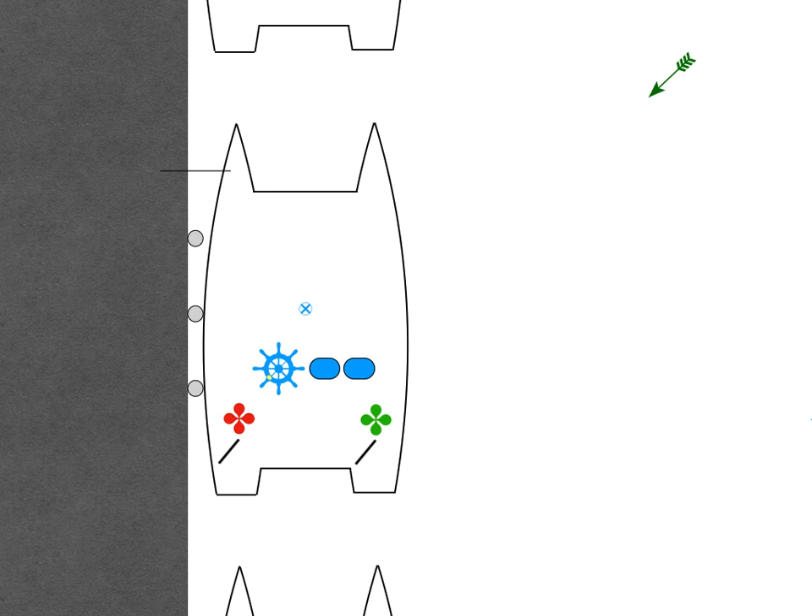When you're all ready to go, get the lines slipped, leaving the most windward breastline until last. And as you can see, we've got a headwind as well as a crosswind. So in this example, we're going to take off the bow breastline last. When the lines are all slipped, put the engine nearest the dock into forward idle and the other engine into reverse idle.

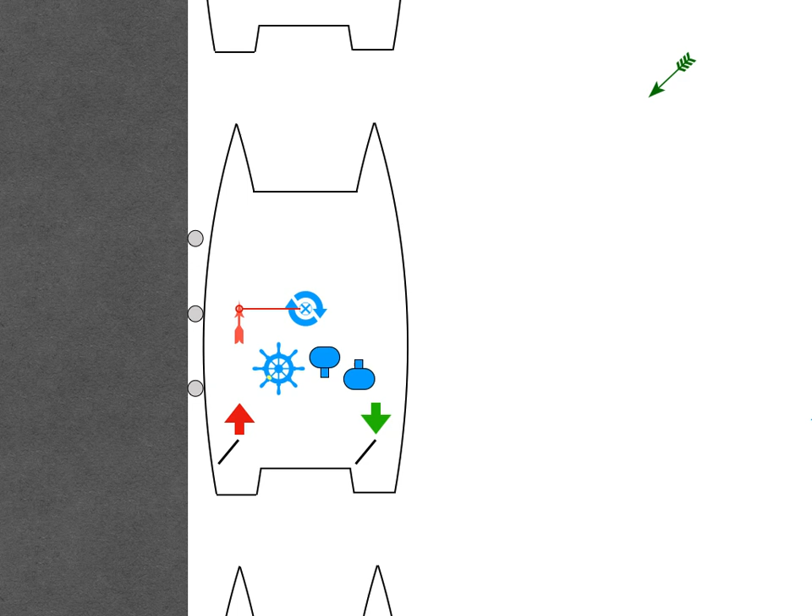Let's have a look at the forces that we've just set up by doing that. The port engine is left of the centre line of the boat, so its forward thrust vector creates a turning moment to starboard. The starboard engine is right of centre, so its aft thrust vector also creates a turning moment to starboard. The port forward thrust and the starboard's aft thrust cancel each other out so that the boat doesn't accelerate either forward or aft. However, the turning moment to starboard remains.

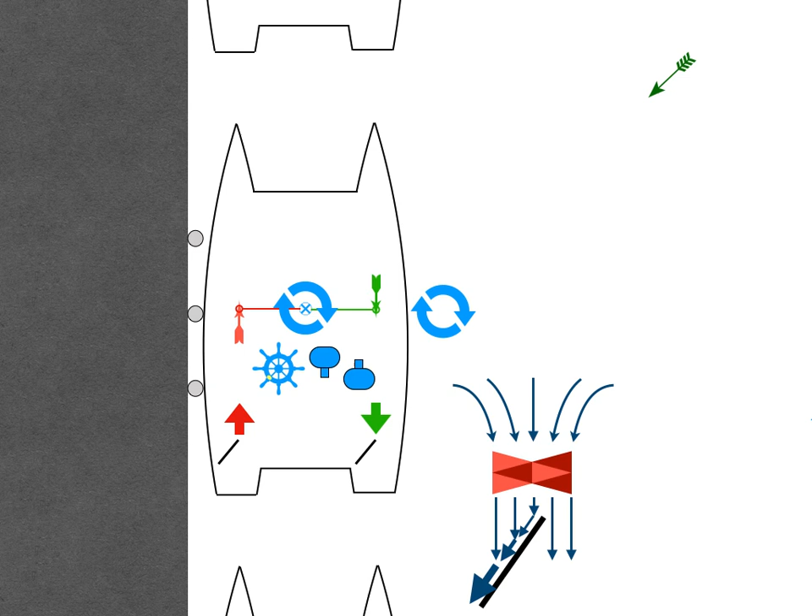The rudders are also creating forces. The prop wash from the port engine creates a strong thrust vector to starboard. This force is aft of the centre of gravity, so this creates a turning moment to port. The starboard engine, drawing water past the rudder, creates a very small thrust vector to port. This force is aft of the centre of gravity, so it creates a very small turning moment to starboard.

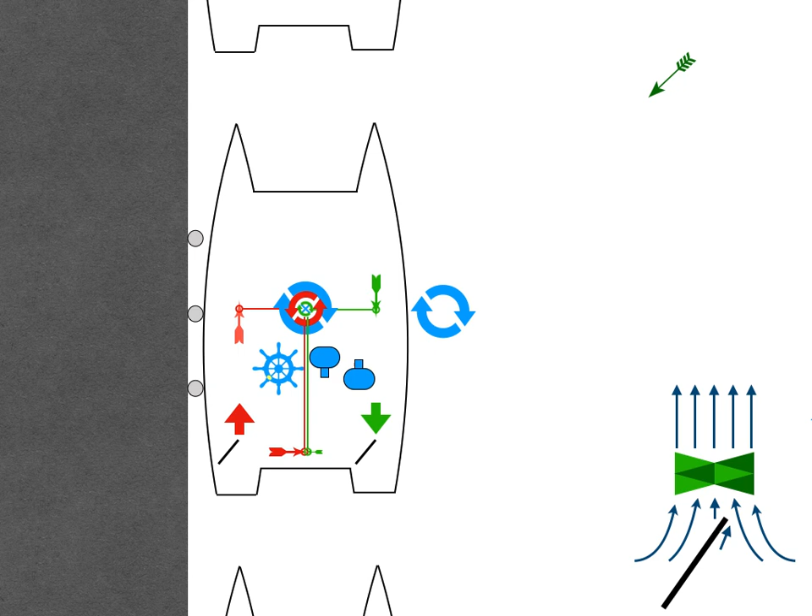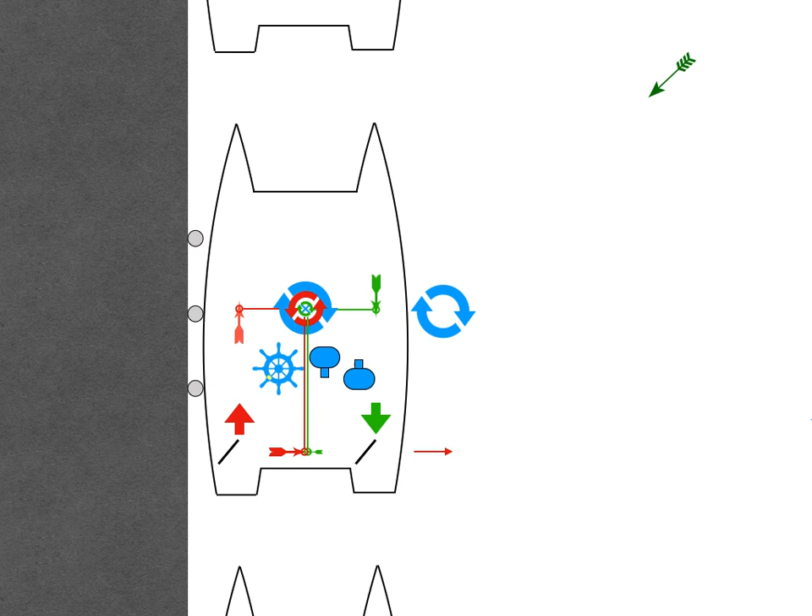The large port rudder thrust vector to starboard is only slightly cancelled out by the very small starboard rudder thrust vector to port. This leaves a residual thrust vector to starboard. The larger turning moment of the port rudder works against the turning moment of the engines, while the smaller turning moment of the starboard rudder works with the turning moment of the engines. These three combine and result in a slightly smaller turning moment to starboard.

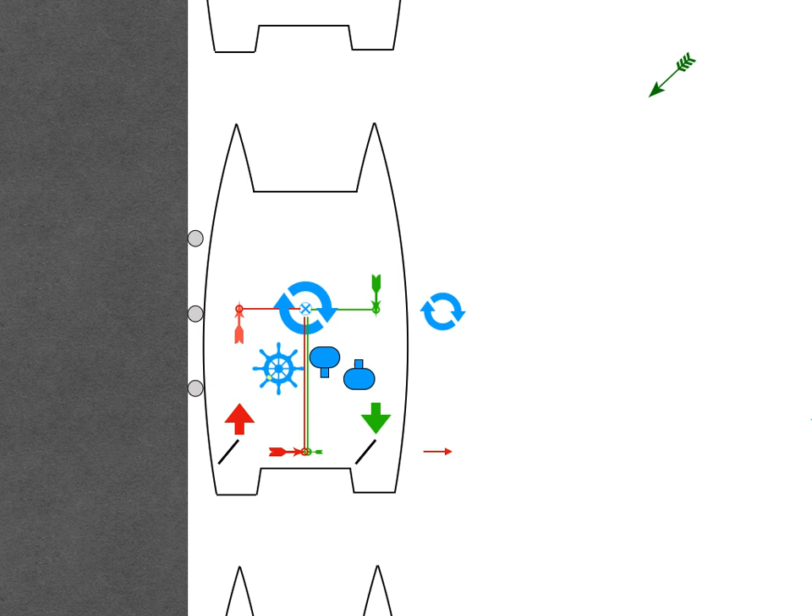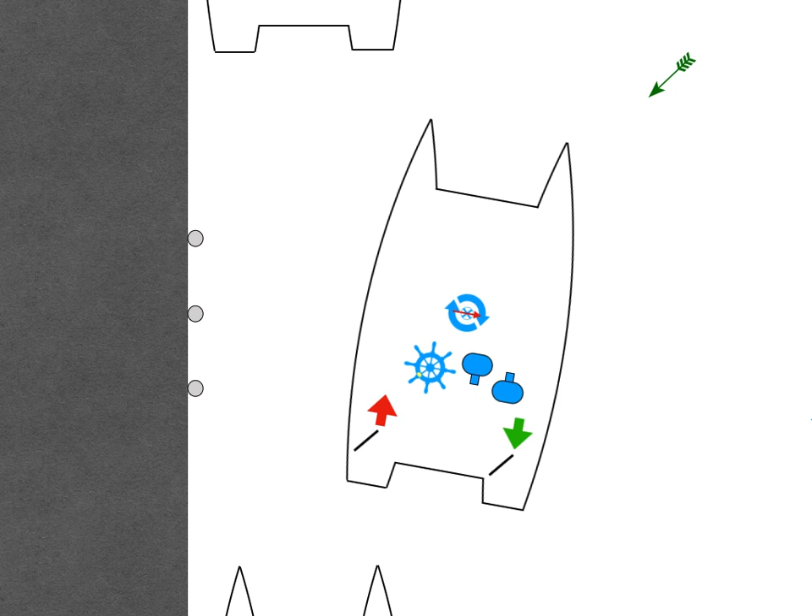Let's now look at what these forces are going to do to the boat. So we'll put them back where they belong over the boat. So the boat's now going to move away from the dock and turn slowly away from the dock at the same time. If it doesn't move, then the force of the wind is greater than the residual thrust vector. So simply increase power little by little on each engine equally until the boat starts to move. You might end up with a lot of power on. As long as the boat's not moving fast, that is fine.

If the boat starts to drift forwards or backwards with the elements, simply increase thrust a little on the appropriate engine. Once the bow is well clear of any other boats or obstructions, simply put the engine that was in reverse into neutral and increase a little on the engine in forward. This keeps the boat tracking gently into the wind to avoid being blown back to leeward. Steer where you want to go, and finally bring the other engine into forward gear and away you go.

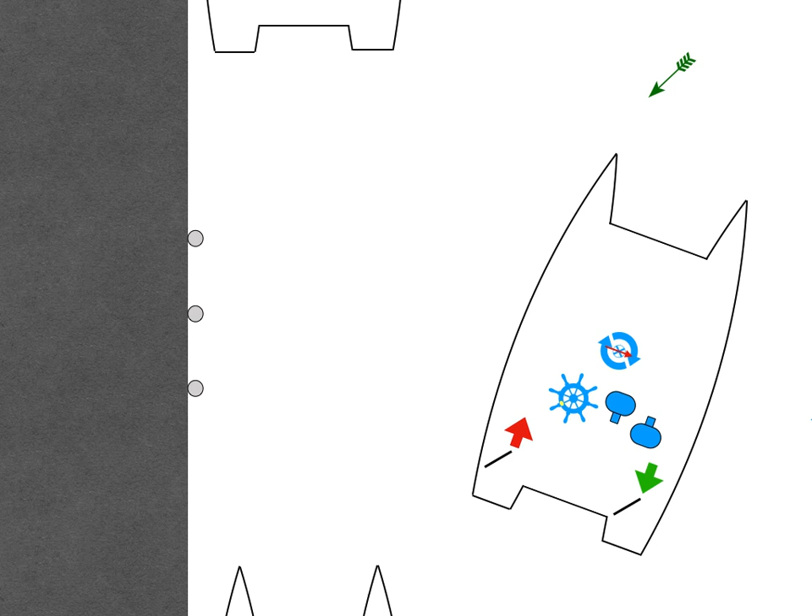Quick summary. To move the boat sideways against a breeze, turn the helm fully towards the dock. Let go all lines. Set the engine nearest the dock to forward idle and the other engine to aft idle. If the boat doesn't move, increase power on both engines a little at a time until it moves.

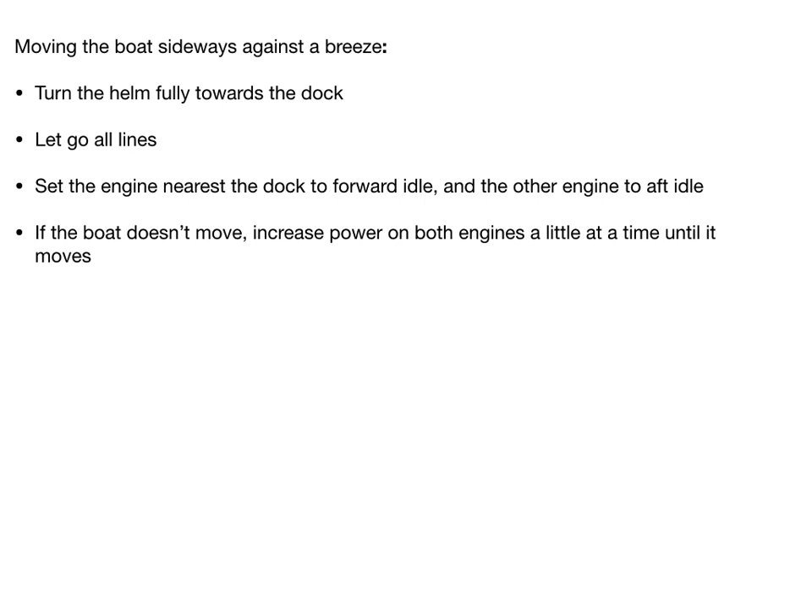If the boat moves forward towards an obstruction, increase thrust as necessary on the engine in reverse. If the boat moves aft towards an obstruction, increase thrust as necessary on the engine in forward. When the bow is well clear of any obstructions, set the engine in reverse to neutral. Steer as required, and then set the engine in neutral to forward as required.

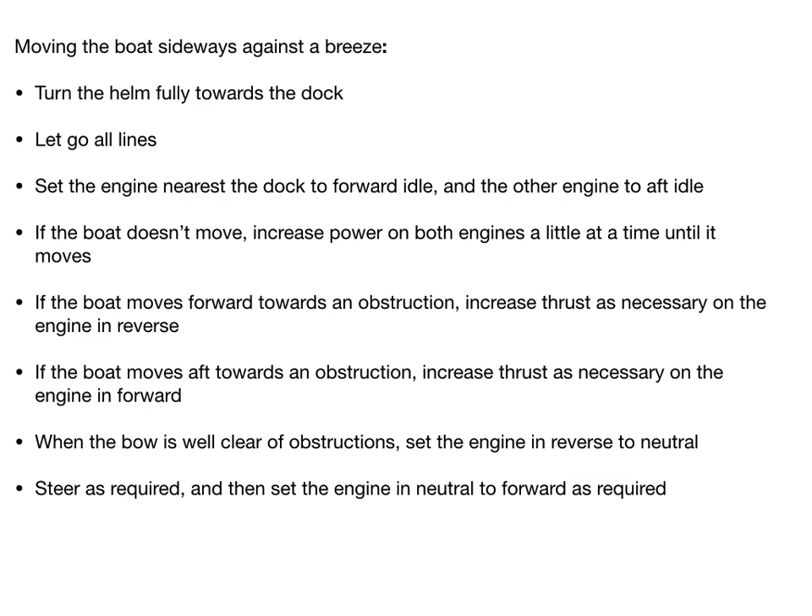Hope that helps. We will be doing another video similar to this one discussing stern drives.